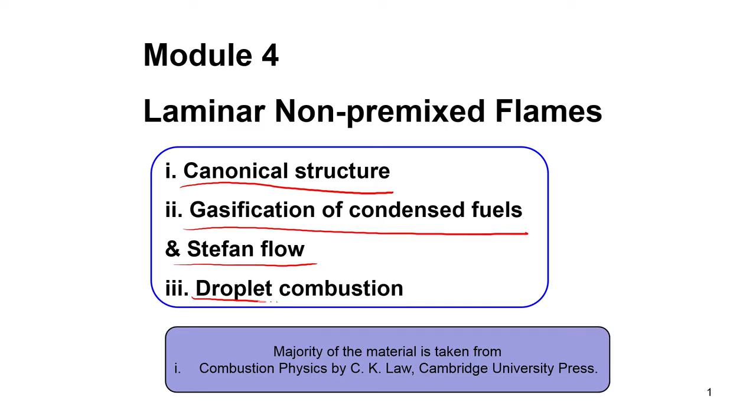In these lectures we will see how a droplet evaporates and burns, and how a non-premixed flame is essentially formed around the droplet. In today's topic of non-premixed flames, we will talk about the canonical structure, that is the basic structure of non-premixed flames, the gasification of condensed fuels, Stefan flow and droplet combustion. All these problems are of very high importance in an air breathing aero engine.

But you can always ask that the situation in an actual engine is much more complex, because in a gas turbine combustor the turbulent Reynolds number is very high, as the pressure is high and the density is high. The combustion happens in a very strongly turbulent state. But as we will show later, even though fuel-air mixing is promoted by turbulence, if we take the entire flame we can find segments of the flame in which the laminar flame structure will be preserved.

So to understand a unit flame, a fundamental building block of a big complicated turbulent flame structure, we need to first know what a laminar flame structure looks like. That is the importance of today's study: to understand something complex, you have to understand its basic structure first. So today we will deal with the fundamentals of laminar non-premixed flames, and what we study will go a long way in our understanding of what happens in a gas turbine engine, which will come later.

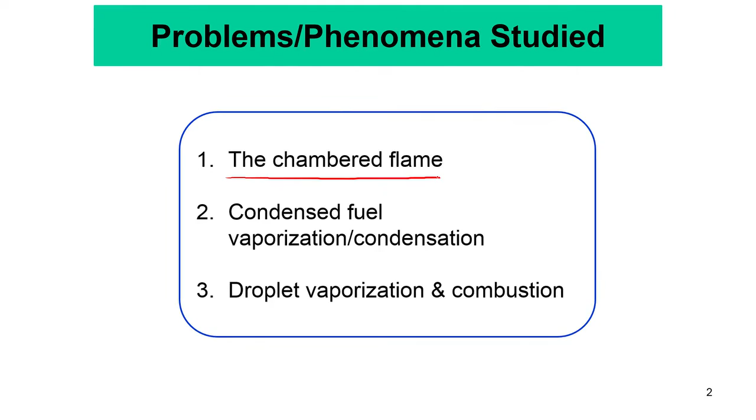That is, we will study the chambered flame. It is basically a very ideal non-premixed flame. It is an example of an ideal laminar non-premixed flame in which there is no flow, there is no convection.

Okay. Of course, in last class you have seen that even if there is flow, you can always find a small region near the flame, at the flame, where you can think that the flow is negligible, or the convective terms are negligible because they are of higher order, and the flame can be described by a competition between your diffusion and reaction. So, of course, one can do the idealization, but in this chambered flame, we will assume that there is no flow as such, and only species diffusing.

Of course, you remember that by flow we mean the flow bulk velocity u. When we say diffusion, we mean the diffusion velocity, that is capital V_i, right. So, here in this chambered flame, we will only have diffusion in the sense that only species will be diffusing from two sides and will meet at the flame, and then the products will be diffusing out of the flame, and also heat will be diffusing out of the flame. So, that is the description of a chambered flame. We will come into that.

Then we will consider condensed fuel vaporization and condensation. If you take a beaker, or a vessel which is half filled with water, say, and then we continuously blow wind on the top of this vessel, so as to remove any vapor accumulation of the liquid, then we will see how we can describe that. As you will see later, this will be essentially a precursor to this study. So, after we have done this study of condensed fuel vaporization and condensation, we will move on to droplet vaporization and combustion.

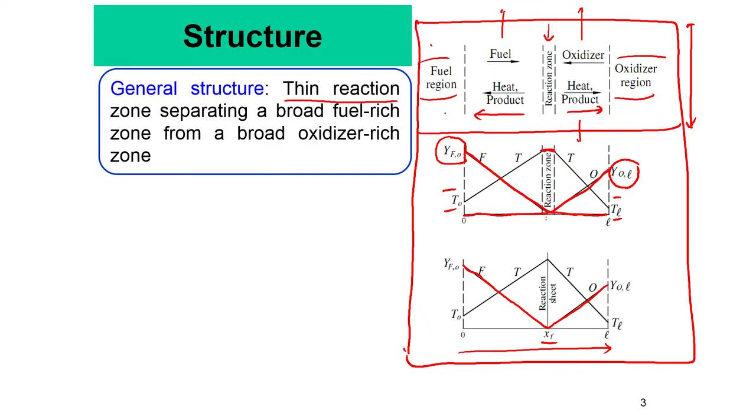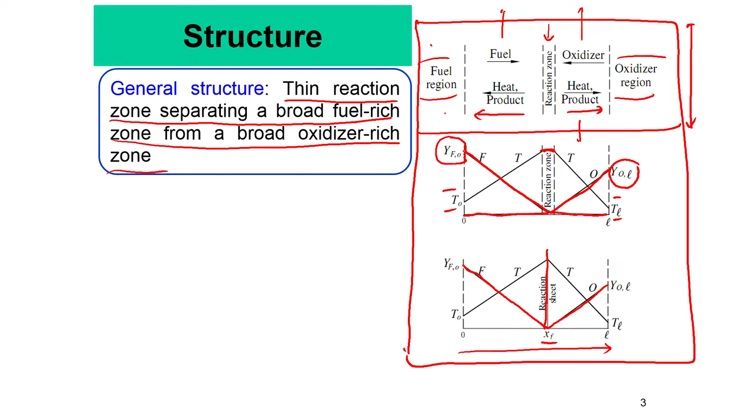The reason is simple, because the fuel and oxidizer do not meet and they are not premixed a priori. They only meet and get mixed at the reaction sheet or the reaction zone. So this general structure is essentially a thin reaction zone separating a broad fuel rich zone from a broad oxidizer rich zone. This is much broad, this is much broad, this is very thin. So that is why we use this nomenclature.

Now as we have seen, for infinitely fast reaction compared to diffusion, the reaction rate itself need not be infinitely fast, we just consider it to be infinitely fast compared to diffusion. It is much faster than the diffusion process, because diffusion is a slow process, and the reaction zone shrinks to a sheet. This phenomenon is diffusion control, and we call this a diffusion flame, but we will call this a non-premixed flame, because both premixed flames and non-premixed flames are essentially diffusion controlled.

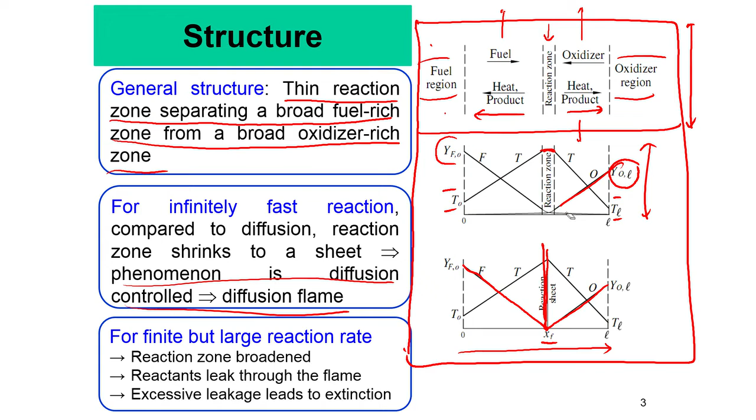When we consider a finite but large reaction rate, the reaction zone becomes broadened and reactants leak through the flame, and excessive leakage will lead to extinction. So this is the reactant leakage phenomenon that I was talking about. You see that this does not go to 0 here, neither does this go to 0 here.

All right. We will just recall the coupling function formulations that we did in the previous class. We defined the stoichiometrically weighted mass fractions as y tilde equal to 1 by sigma iN times yi divided by yNB. N is a reference species which is not defined yet; it can be fuel, oxidizer, product, etc. B is the boundary location. So in this case yNB can be essentially yF0, where we consider fuel to be the reference species and B to be the left hand side boundary.

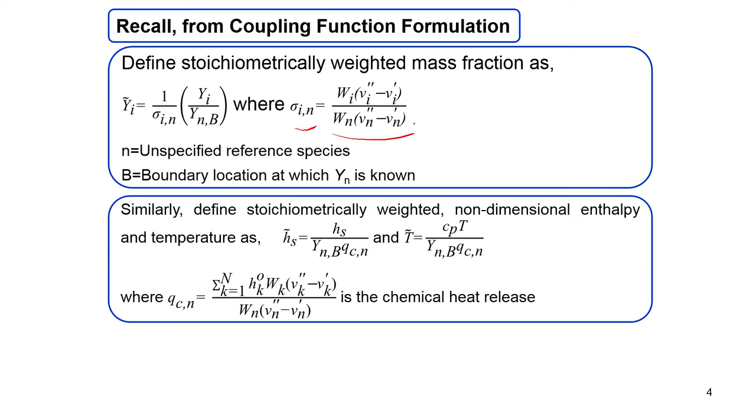Also, this sigma iN is the stoichiometric coefficient, defined as the ratio of molecular weight times the difference of the stoichiometric coefficients divided by the molecular weight of the reference species times the difference of its stoichiometric coefficients. And then we defined a stoichiometrically weighted non-dimensional enthalpy and temperature, Hs tilde and T tilde, and as you will see, Hs tilde will be essentially equal to T tilde minus T0 tilde.

Essentially these definitions will be very close, and we will use them interchangeably. And this QCN that is defined here is the chemical heat release, which is normalized by this Wn times nu, the difference of the stoichiometric coefficients. We will come to this, and then we will see that using this we can define a non-dimensional species enthalpy coupling function, defined as T tilde plus yi tilde.

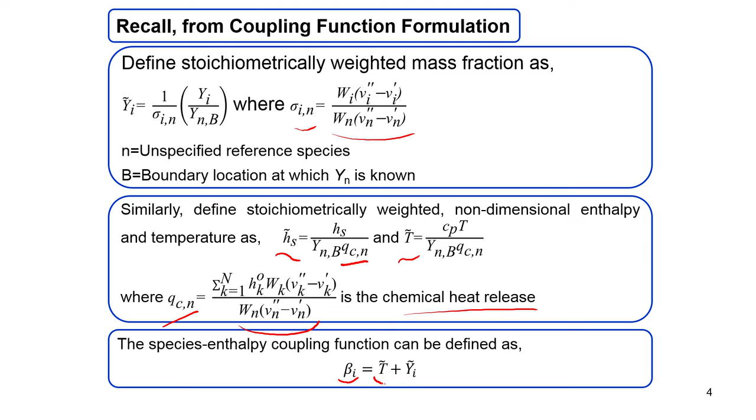Just to recall how we did this, if you remember, in the flame zone we considered that the convection could be ignored, because it was essentially a competition between diffusion and reaction, and assuming that the process is steady state, we arrive at this equation: gradient of lambda by Cp times gradient of sensible enthalpy is equal to heat release rate. This came from your energy equation,

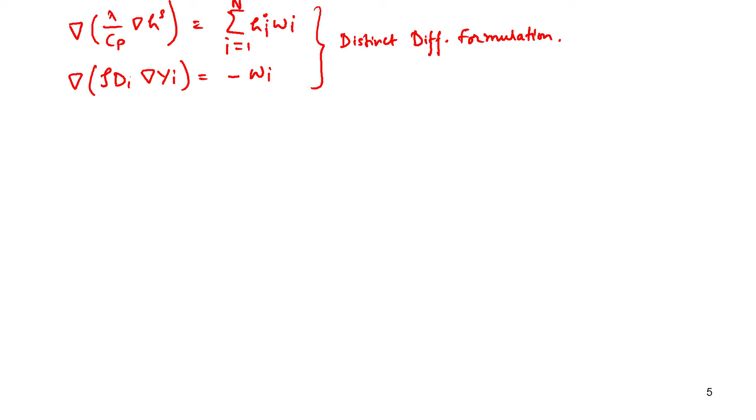and gradient of rho Di times gradient of yi is equal to minus wi, that is the consumption or production rate of individual species, which came from your species equation, and these were like a distinct diffusivity formulation. All right, and then if we consider a one-step combustion reaction,

which is given by nu F F plus nu O O goes to products. These are stoichiometric coefficients you already know. This is the fuel, this is oxidizer, goes to product in one step. Then we can define yF tilde equal to yF by yF0, where 0 is essentially our left hand side boundary, and yO tilde equal to the mass fraction of oxidizer divided by sigma for the oxidizer divided by yF at the boundary.

We have chosen N to be the reference species, and Hs tilde is equal to Hs, the sensible enthalpy, by yF0 qc, and T tilde is equal to Cp T divided by yF0 qc, where qc, this chemical heat release, is nothing but the summation k equal to 1 to capital N of hk, the specific enthalpy of formation, times molecular weight, divided by the reference species, which is our fuel.

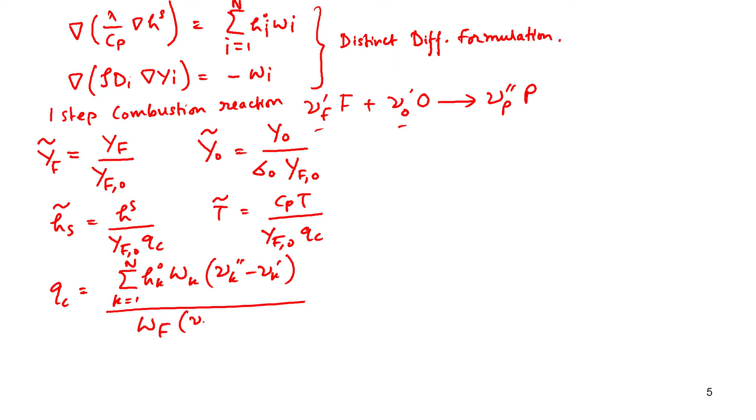Okay, and then sigma, because here we also define sigma, sigma O is nothing but WO times nu O double dash minus nu O dash, divided by WF times nu F double dash minus nu F dash. All right,

and then with this simplification we have already shown that we can arrive at these equations: Laplacian of Hs tilde is equal to Cp by lambda times Wn, and del square yi tilde by Lewis number of the ith species is equal to minus Cp by lambda times Wn, where Wn is equal to capital Wn times nu n double dash minus nu n dash divided by yF0 times this omega, which is the species independent reaction rate. We'll just write it here because it is not visible.

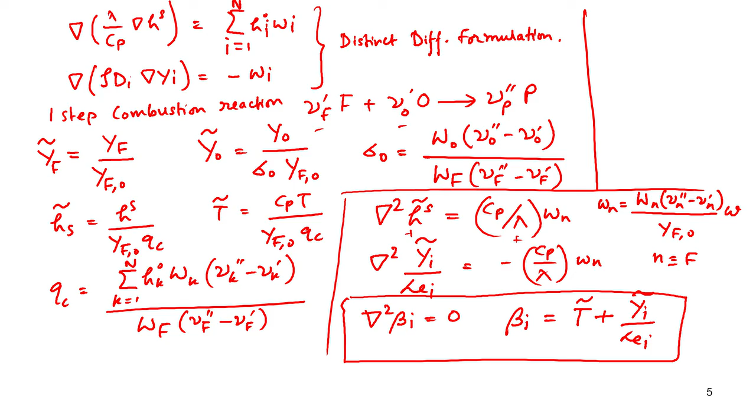So this derivation involves many symbols, but is actually very straightforward. I suggest you do this on your own, and then everything will become very clear. In the end, the advantage, the beauty, is that this whole complicated equation just becomes a Laplace equation with the right hand side equal to 0, and this is your coupling function: beta i is equal to T tilde plus yi tilde by Lewis number i.